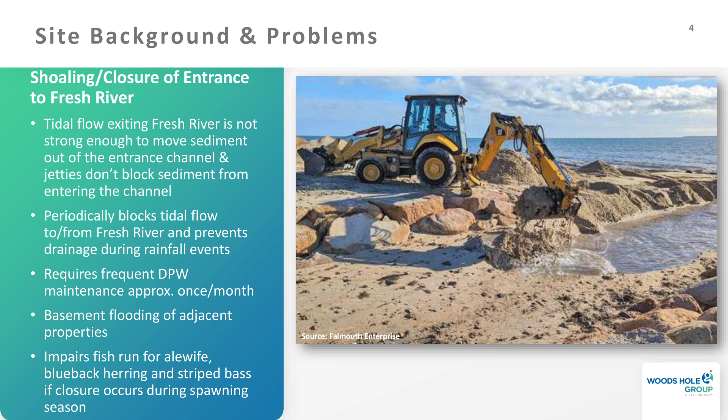One of the other problems we know is degraded water quality and coastal habitat in the system. The shoaling at the entrance blocks it and prevents flushing of the Fresh River system with cleaner waters from Vineyard Sound. The shoal inside Fresh River also restricts propagation of that cleaner water up into Fresh River, and as we've learned through this study, it also limits the ability of that system to drain very well, so it doesn't allow the water to come out very well either. We also know there are a couple of outfalls that discharge untreated stormwater into the system, which also impacts water quality and coastal habitat.

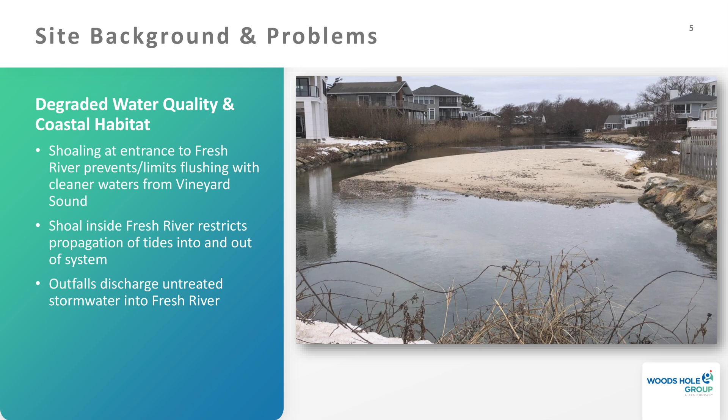I'll reiterate the project goals. The first is to restore tidal flow, modifying the system to improve tidal exchange without increasing flooding to surrounding properties. A lot of the properties around Fresh River Basin, the lower part of Fresh River, are very low in elevation, so one of the things we looked at as part of this study was how to restore tidal flow without causing flooding of the properties around the Fresh River.

Another goal is to minimize sediment accumulation, so we looked at ways to alter the entrance to create a more self-sustaining system that doesn't trap sediment. We're also looking to improve ecosystem habitat by enhancing tidal flushing so we could restore about 1.6 acres of coastal habitat and about 1,870 linear feet of fish run. And then also looking to improve water quality, enhancing tidal flushing and remediating stormwater pollution. So those are the 4 goals we were working on with the project.

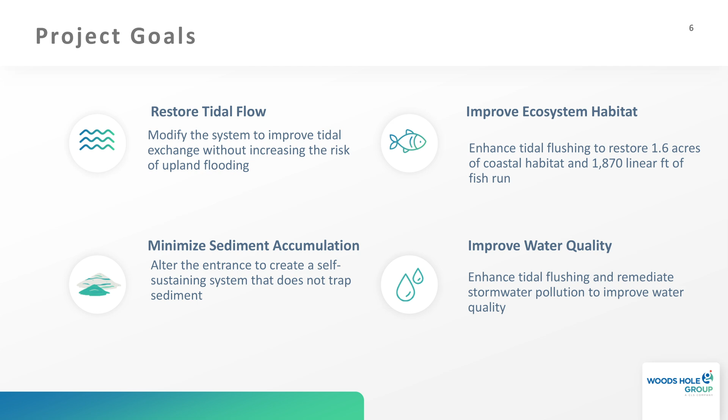This just talks about funding, which I showed last time. The town got a grant from CZM for $90,237. They are matching that with about $14,000 in cash and about $15,000 worth of in-kind services.

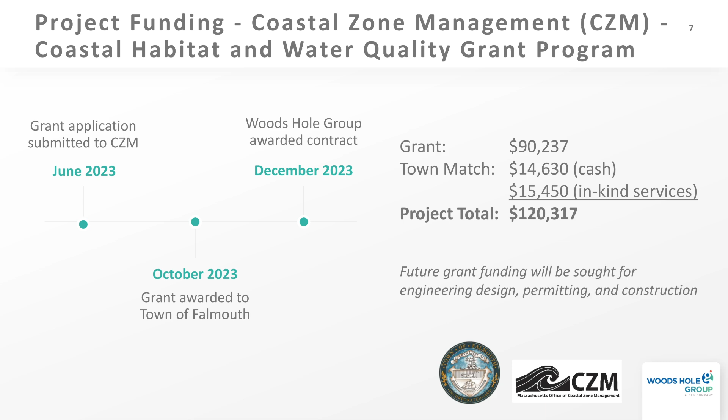Now we're going to talk about existing site conditions. As part of this grant, we had an opportunity to look at water quality, collect samples, and have them analyzed for water chemistry. We took samples at 3 locations, shown as 3 red dots: one in Fresh River Basin, one in the stormwater system in a catch basin connected to the stormwater infrastructure, and a couple in that isolated wetland off to the northeast. We had those samples analyzed for nutrients — nitrogen, ammonia, nitrate, and total nitrogen.

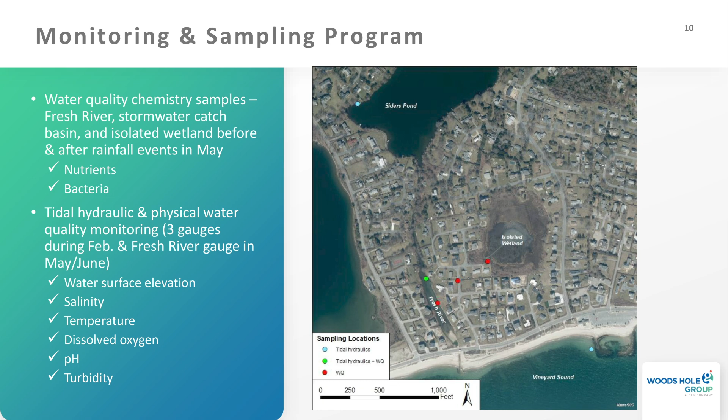What we see is that salinities in Vineyard Sound are pretty typical of a marine environment, around 29.6 PSU, pretty steady at the top. Siders Pond varied, at the time we took these data in February, between 6 and 20 PSU. There's a lot of variation in that orange line, a lot of that's influenced by rainfall—as it collects rainfall it becomes fresher. It's also influenced, as you'll see in a minute, by some water from Vineyard Sound that does make it up into Siders Pond.

Siders Pond was about 4 feet below the surface. That's a good question, we can get back to that in a little bit, but I think there's a halocline in Siders Pond—salty water at the bottom, fresher water at the top. We think that gauge was below that halocline, so it was getting some of the... you're saying no because the halocline is much deeper. I know, but at the shoreline it might be coming up higher. We were kind of right along the shoreline here.

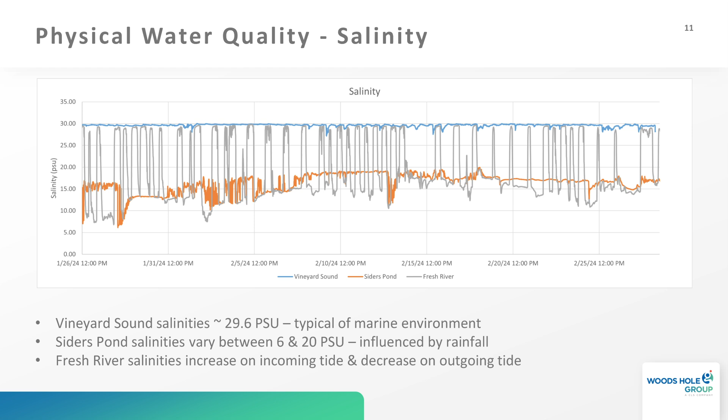And again, that's just in February, and then May and June. We had a gauge out there again in May and June, so two months, and both times it met state standards for temperature.

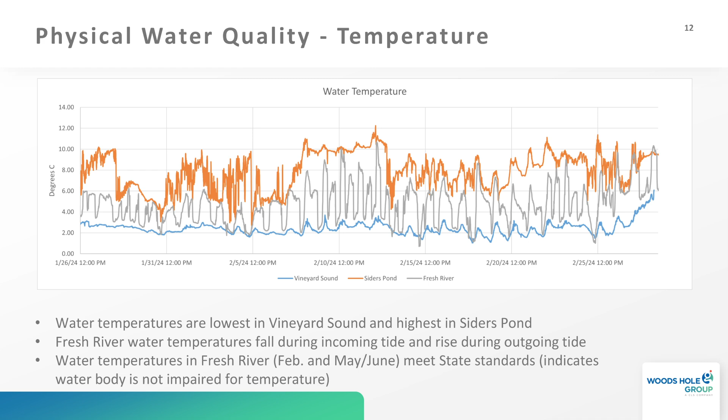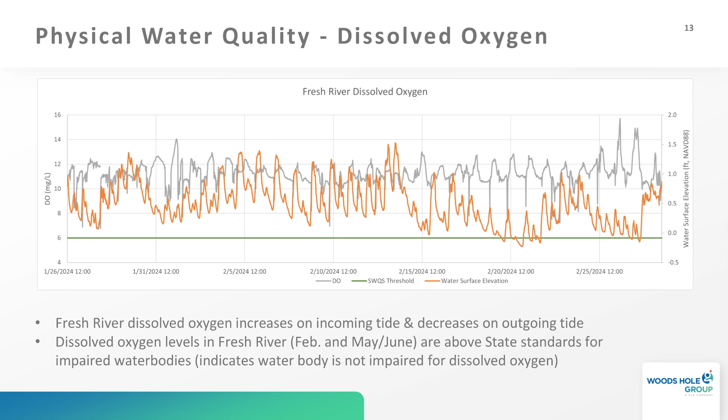Bacteria comes from, a lot of times, septic systems, but a lot of the neighborhoods around here are sewered. So it could typically be from waste from wildlife, waterfowl, things like that. The nitrogen is typically from runoff from people's yards if they're using fertilizers, or possibly from upstream contributions, although we know Siders Pond is relatively low in nitrogen, so it's not likely that increased nitrogen is coming from upstream.

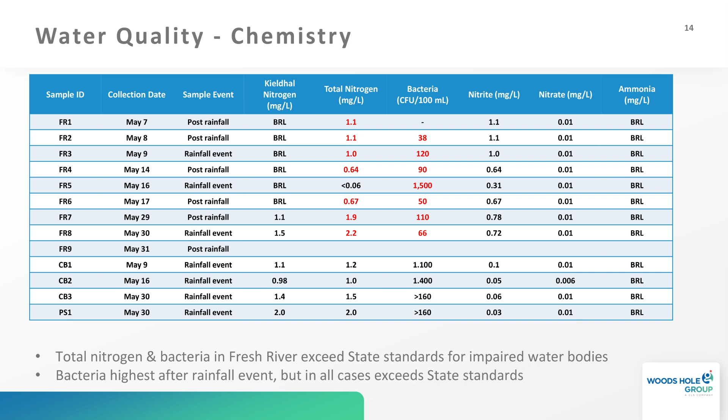So there's some sort of attenuation causing that tidal signal from Vineyard Sound to be attenuated as it moves up into Fresh River and Siders Pond. That could be the culvert, it could be that shoal inside Fresh River, it could be just friction along the length of that channel. There's a number of things that can cause that attenuation.

Another thing we see in these data are short-term increases in water level, both in Fresh River and Siders Pond, that aren't related to tides at all, but more related to things like winds and rainfall. So we see that in the data set as well.

Another thing we noted here is that the elevation at the bottom of the culvert in Fresh River is about minus 1.6, so 1.6 feet below this tidal datum we call NAVD 88 - you can think of it as mean sea level. But we noticed that the lowest elevations from the water surface elevation data in Fresh River never reached that. So that indicates there's something causing or not allowing Fresh River to drain as much as it might, because the lowest part of that culvert is quite a bit lower than what we see in this tidal signal.

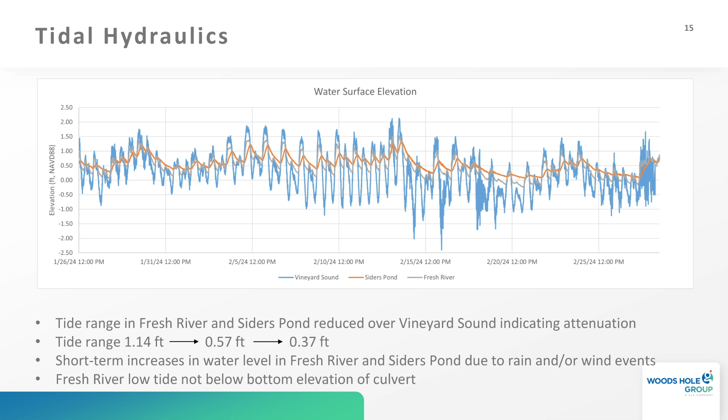All right, I'm going to spend a few minutes on this engineering assessment we did. The goal was to use analytical methods for hydrodynamics and sediment transport to try to develop a tool we could use to evaluate these conceptual alternatives.

We calibrated the hydrodynamic model using all the data we collected, water surface elevation data. You can see here at the bottom these graphs of water surface elevation, both measured on the bottom axis and modeled on the y-axis, in both Siders Pond and Fresh River. You can see that those points are all sort of centered around that line, meaning the model did a good job of predicting what the data showed.

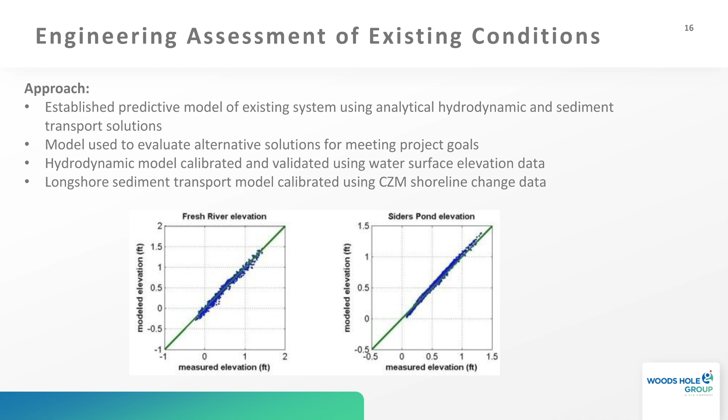We also looked at a partially blocked channel, when sediment is partially blocking but there's still flow coming in from the sound. We see that during those time periods, there are really strong landward pulses of sediment that end up transporting sediment into Fresh River. That's why that shoal forms after a storm.

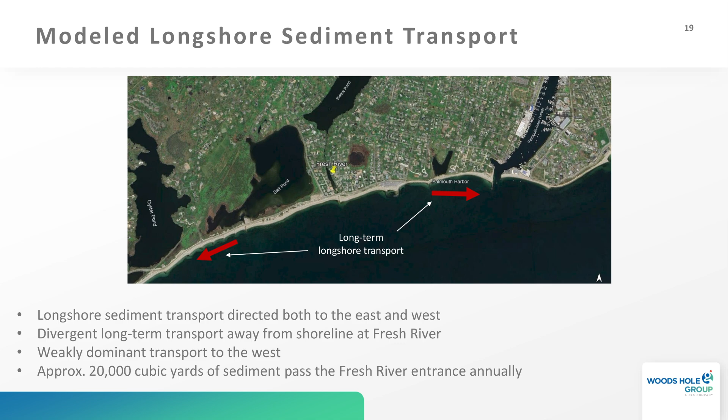Alternative 2 is dredging the shoal at the entrance to the Fresh River Basin, down to elevation minus 1.5, and bigger than what you can see there today. That's the areas underneath the part of the shoal that stick up above the water, about 230 feet in from the edge of Surf Drive. So we would dredge the entrance to the Fresh River Basin.

That's alternative 2. Alternative 3 is modifying the culvert under Surf Drive to hopefully reduce that tidal attenuation and improve water quality and habitat value. Alternative 4 is to modify the jetties at the entrance to the Fresh River, with the main goal to minimize the amount of sediment that can get into the system. Alternative 5 is to implement some stormwater best management practices, to try to remove the nutrients and bacteria that we measured there.

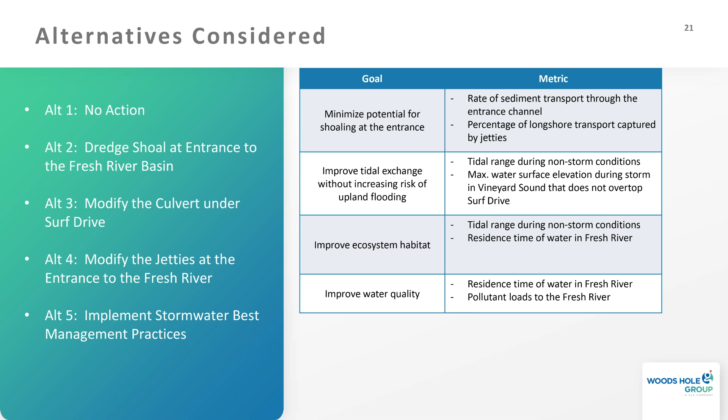Metrics there were reducing residence time in Fresh River, and also reducing pollutant loads to Fresh River by doing something to the stormwater system. So those are the metrics we used to evaluate these alternatives. Now I'm going to go through each one and tell you how it measured up against the metrics.

No action: I don't need to spend a ton of time on this, but basically you don't meet any of the goals with this. You don't change the rates of sediment transport in the channel, you don't increase the percentage of sediment along the beach trapped by the jetties, you don't increase the tidal range, you don't reduce the residence time, and you don't change the pollutant loads to Fresh River through the stormwater system. So none of the goals are met, but we already know that.

With dredging the shoal at the entrance to Fresh River Basin, in terms of minimizing the potential for shoaling at the entrance: the sediment transport potential on the outgoing tide is increased, so it can flush more material out if it lands in the channel. But those pulses of landward moving sediment during storms increase. So it's a mixed bag in terms of impacts.

There are no changes with this particular alternative, all by itself, in trapping more sediment along the edges of the jetties. So we don't have any influence on the percentage of longshore sediment transport that's captured. That goal is partially met.

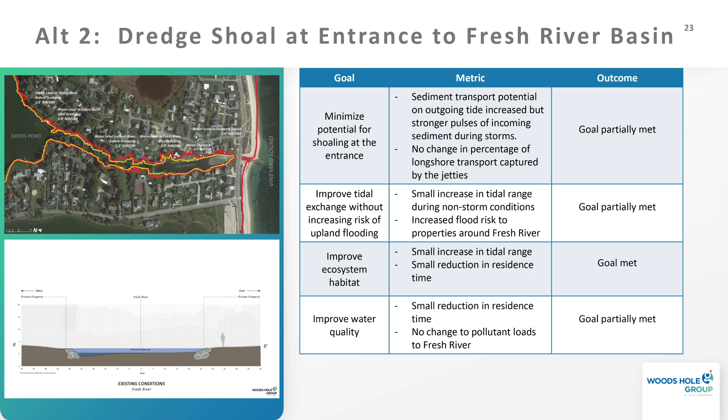Okay, now I'm going to look at this next one here, if you guys can get a better idea. So the red line is sort of the flood extent during that storm condition right before the water overtops Surf Drive. This is oriented sideways, so east is to the top of the page. You can see some of those properties on the east side of Fresh River Basin with increased flooding, and a number of homes that could be impacted by this if there weren't any mitigation, like berming or increasing the elevation of those structures. A number of those homes have been elevated, so the structure itself would not be impacted, but there are probably 5 or 6 homes that haven't been elevated that could be impacted by this.

Yeah, we can get back to this later if you guys have questions about it.

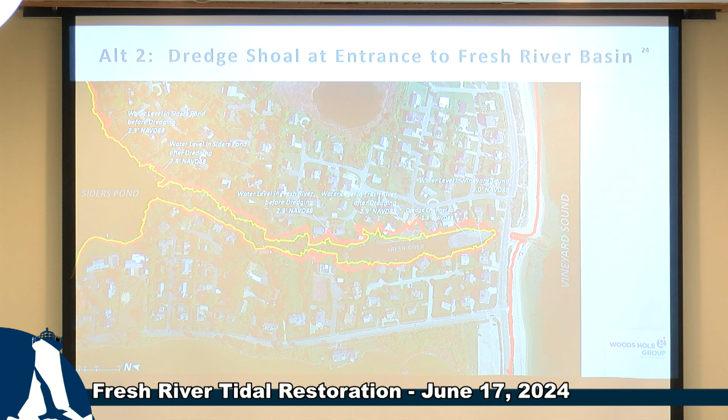One thing I didn't talk about is that cross section on the bottom left. It's kind of hard to see, but the dark blue at the bottom is the existing average water level, and the lighter blue line at the top shows the increased flooding up to elevation 2.8 in the Fresh River Basin. So you can see how it overtops the banks, overtops those little stone coastal engineering structures, and expands out onto the lawns on either side.

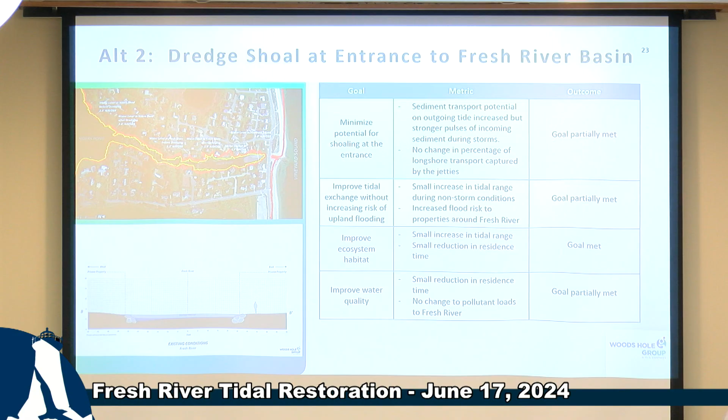Okay, we also looked at modifying the culvert under Surf Drive. I think this was one of the biggest surprises to me with this study. Basically, we found that increasing the size of this culvert is not going to help at all. I was very surprised by that, but this is what the model showed - it's not the main feature that's causing attenuation of that water. A lot of it is that shoal that we talked about in the previous slide.

So in terms of minimizing potential for shoaling at the entrance with this particular alternative, the seaward flowing currents are reduced, so it has less ability to flush material out on the outgoing tide. Those sediment pulses coming in on storms are a little bit weaker. So there's a mixed sort of reaction to this alternative. Again, no change in the percentage of longshore sediment transport captured by the jetties. So we classify this as being partially met.

In terms of improving tidal exchange without increasing risks of upland flooding, we did not find any change in tidal range under non-storm conditions, and only slightly higher flood risk to properties around the Fresh River during that storm condition - that was the yellow line shown on that previous graph. It expands out into some of the yards, but I think it only impacts 1 or 2 homes in that area with up to elevation 2.3. So basically we said that goal was not met - we're not able to improve tidal exchange, and we do increase flooding in the upland areas. For improving ecosystem habitat, there's no change in tidal range, no change in residence time, so that goal is not met. For improved water quality, again no change in range and no decrease in pollutant loads, so that goal was not met.

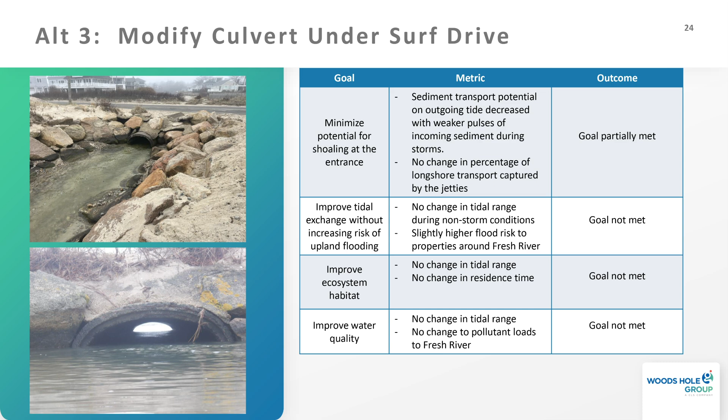Alternative 4 is modifying the jetties at the entrance to Fresh River.

So there's some pictures of what we're talking about here. This involves increasing the length of those jetties by 30 feet and bringing the elevation up to approximately elevation 6 in NAVD 88. I will say that if this moves into further design and engineering, those numbers could change a little bit, but this is sort of the design we're looking at right now.

So hopefully you can see in the bottom picture the extended jetties in relation to the existing jetties. And in the upper picture, the light gray area represents the existing jetties, and the darker ones are the expansion of those jetties.

So with this particular alternative, there's no change to the ability of the channel to naturally flush sediment out, but it does reduce the amount of material that can get into the channel because the jetties are trapping it. So that goal is partially met.

There's no direct change in tidal range, and no increase in risk of flooding areas, but we feel there's an indirect impact on improving tidal exchange because we're not going to have blockages anymore. So that goal is partially met.

Again, with improving ecosystem habitat, no change in tidal range, no change in residence time, but again those indirect impacts to habitat because the channel is not blocked as often anymore. And same with water quality. So those last two goals are partially met.

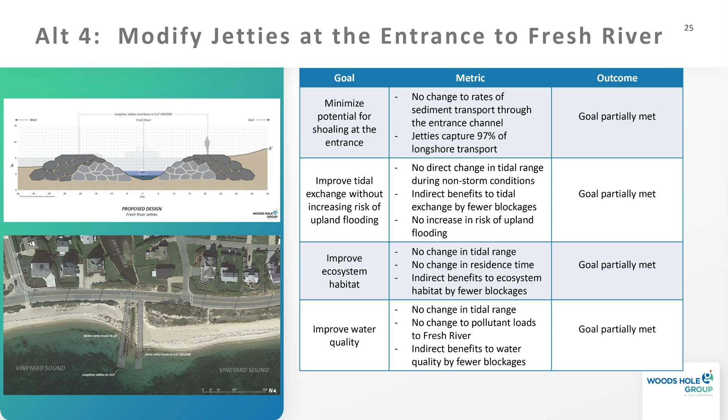Okay, and then the final one is implementing stormwater BMPs. So these BMPs are sort of structural BMPs.

We wanted to identify some sort of green alternatives. Like many of you are probably familiar with that alternative at the end of Mill Road as you go down, and it goes into Crossins Creek. I love that system because it's a green, natural system. It's got some gray infrastructure underneath it, but it was a great design, and it removes pollutants and nutrients from that stormwater before it enters Salt Pond.

We wanted to look for something like that here, but the opportunities were really limited. We looked at rain gardens, which are basically swales with a certain sediment type and plants that filter out a lot of the pollutants. We looked at a constructed wetland back over near that isolated wetland, but found both of those alternatives would involve impacts to private property as well as increase in flooding during storms. So we ruled those out, and instead just looked at structural BMPs.

So that's something you would install, for example, in this upper left picture, at that area where that grate is, and it would essentially filter out bacteria and nutrients. So instead of going through this whole table, the first three goals aren't met, and the bottom one, to improve water quality, is partially met with this alternative.

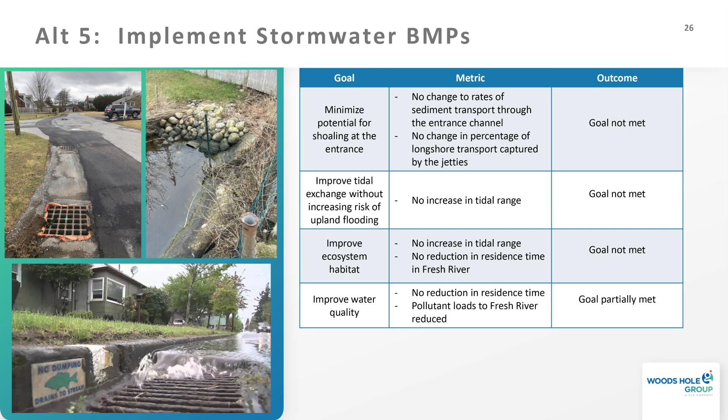Okay, recommendations and next steps. This table on the right summarizes some of the things I just told you. So we've got the 5 alternatives and the number of goals they achieve. You can see that alternative 2 and 4 achieve, or at least partially meet, 4 of those goals.

Environmental impacts range from minor and moderate, to with a stormwater BMP, for example, that's minor environmental impact. There's a little bit more of an impact when you're talking about dredging and the culvert and with the jetties. But I don't think any of those are insurmountable, and I do think any of these projects could be permitted. It's not like they're prohibited or the regulations don't allow them. In terms of permitting difficulty, it ranges from low to moderate, back to low for the stormwater system.

We're still developing costs over here on the right, so that's something the DPW will certainly be interested in, to help decide which of these alternatives, if any, to move forward with. So what the study is showing is that the town will need to consider potentially proceeding with design and permitting for the dredging, the jetty modification, and the stormwater BMP alternatives, either separately or all together. Any one of them would have a benefit. All of them together would have a greater benefit.

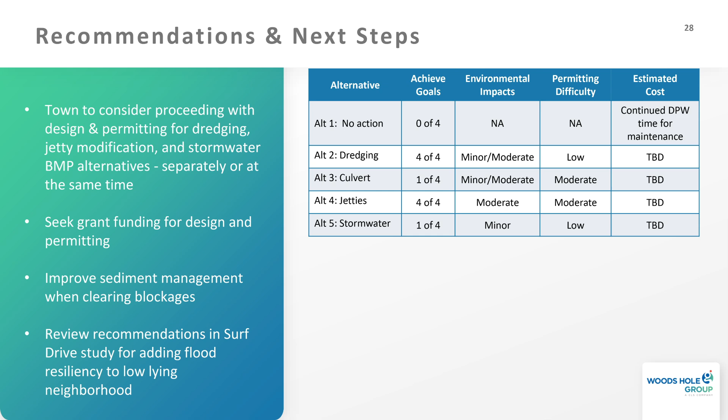I think that's it. So, yeah, I'm going to open this up to questions and comments, and I will try to document. Okay.